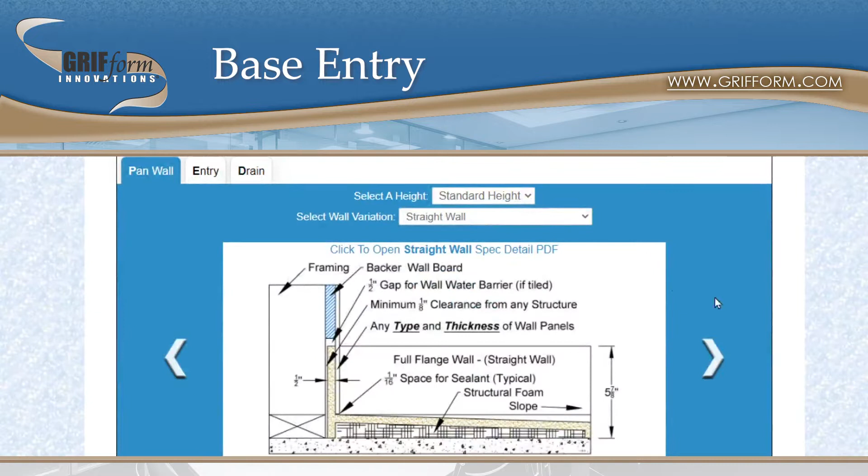In this video, we are going to look at Grifform's custom shower pan entryway options. This option is located next to the pan wall section. In this section, we will be briefly covering our barrier entry options, no drip and drip entry, and our barrier-free options, sloping and ramping.

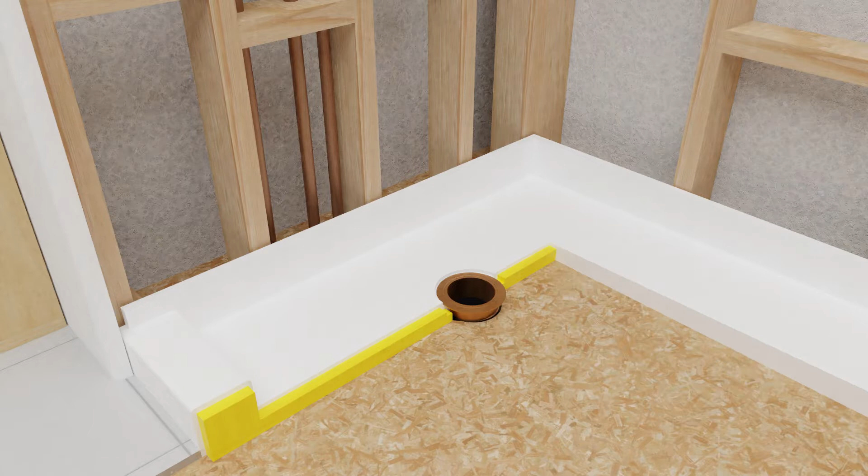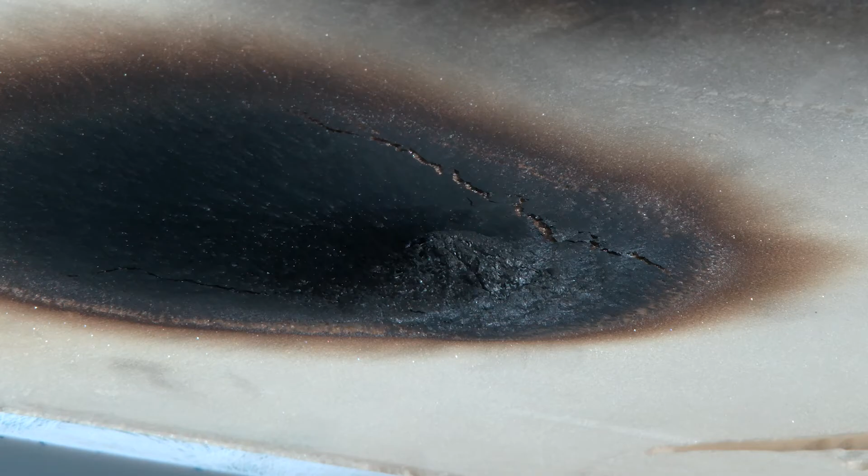All empty cavities in Grifform shower pans are infused with high-density, fire-resistant construction foam. As you can see in this example, even under direct flame, the foam still self-extinguishes. The compact high-density foam infused in these entryway cavities and the shower pan's base reinforce the structure of the shower pan, enabling the surface to resist high amounts of direct force.

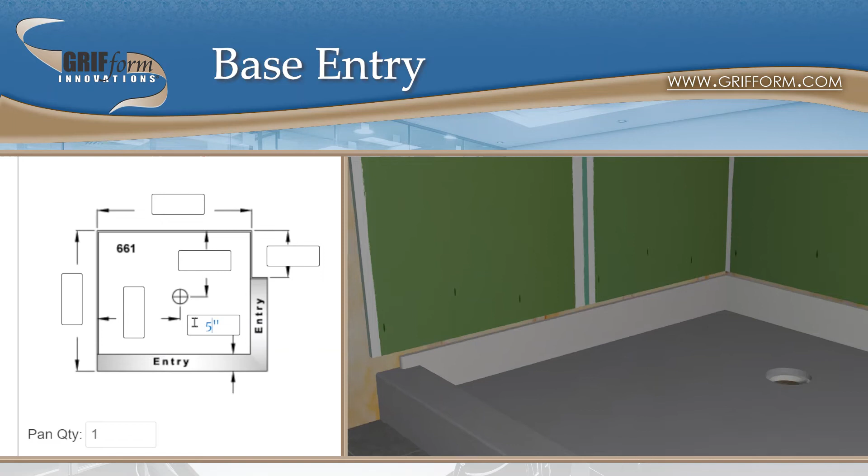As seen in this no drip entry example, the shower entryway width can be adjusted upon inputting your shower pan specifications. By default, the entry width is 3 inches.

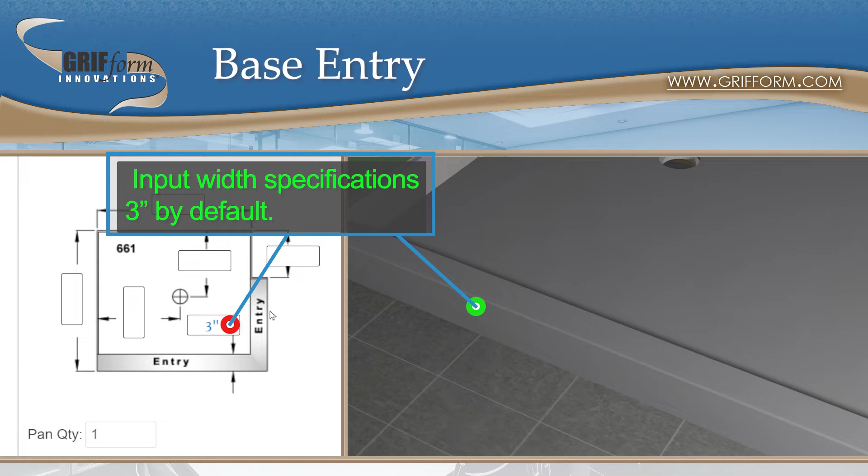Depending on how you want your shower pan built, you can choose between our no drip entry, drip entry, ramping entry, and sloping entry.

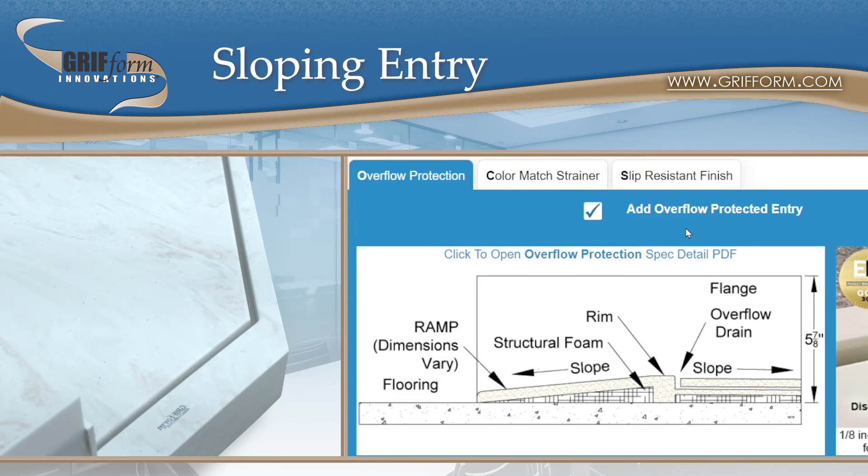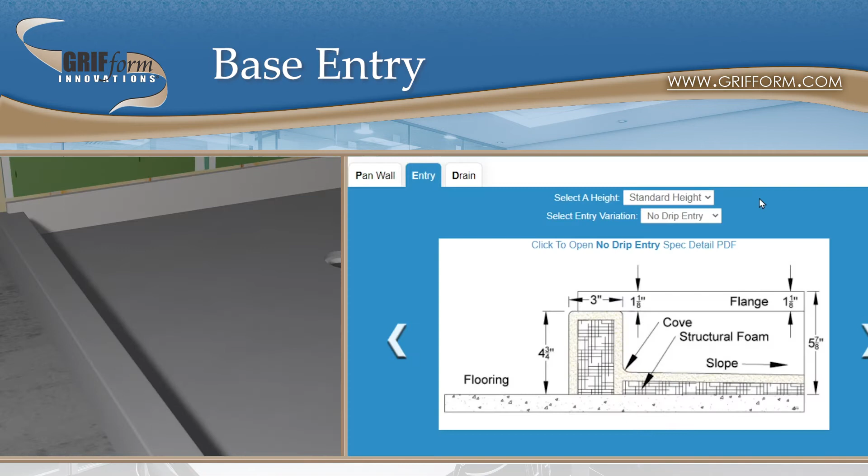Barrier-free entries such as ramping and sloping are commonly paired with Grifform's award-winning overflow protection design. If you are concerned about selecting a barrier-free entryway because you are worried about water overflow, be sure to review our overflow protection section. Through our website, you can adjust the height of your entry point.

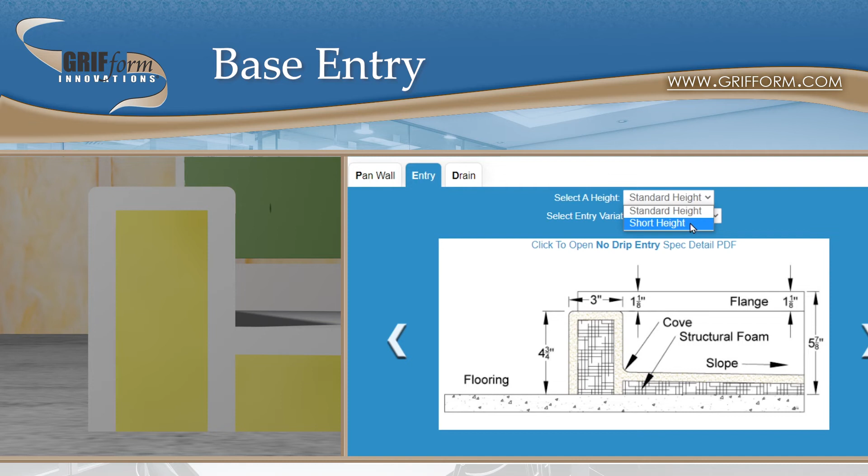The height for a standard barrier entry point is 4 3/4 inches between the top of the entry point and the floor installed on. For a short height, this is 3 inches. Remember to pay attention to how adjusting this also adjusts the height of your pan wall and rim.

No drip entry, drip entry, and ramping entry are designed to be installed floor level. Sloping entry is designed to be installed into a recess. These barrier-free entryways can be built to comply with ADA regulations.